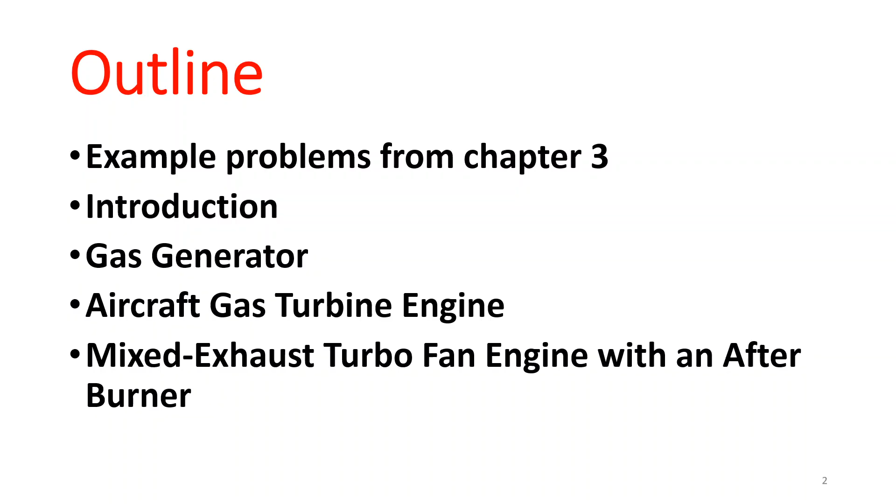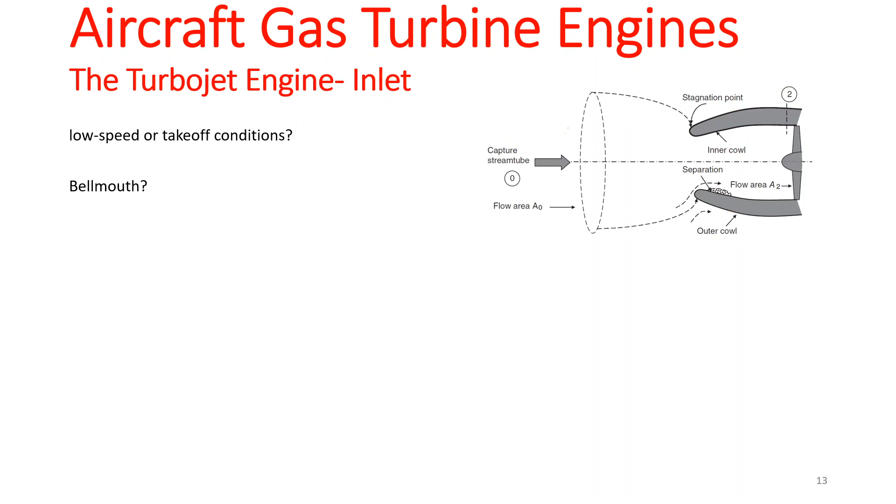I guess at this point I'm already exhausted with this semester, so I'm ready for it to be done. Just make it online? That's actually gonna be worse, I think. I'm ready to give you all an A and just be done with it. But...

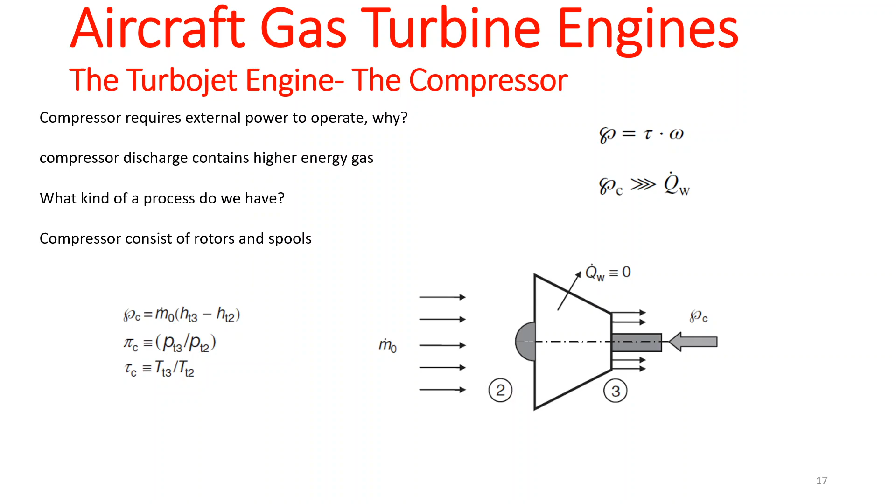So the last thing we talked about was this page, right? We didn't finish the compressor, did we? Okay.

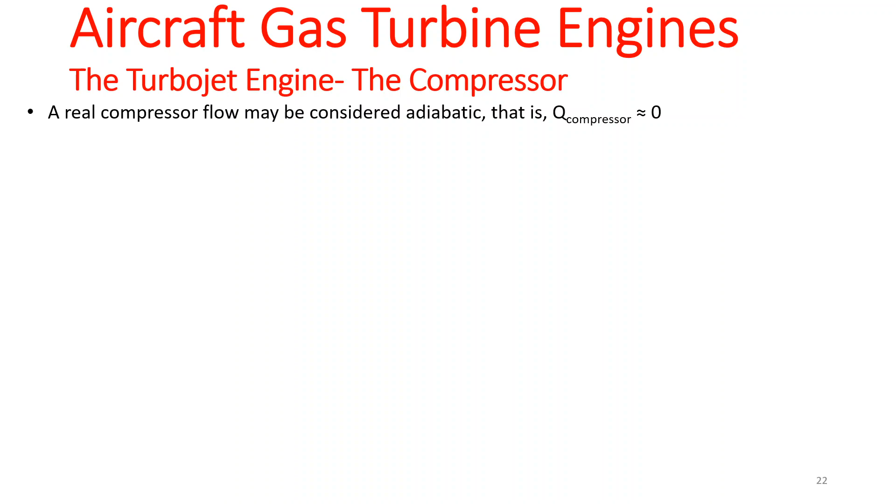A real compressor flow may be considered adiabatic, which means that Q of compressor is essentially 0. The energy transfer to the fluid due to the shaft in a compressor is several orders of magnitude higher than any heat transfer that takes place through the casing. Thus, heat transfer is

neglected. Viscous dissipation in the wall boundary layer and shocks account for the source of irreversibility in a compressor.

We have two main figures of merit, if you will, that describe the compressor efficiency. One is the adiabatic compressor efficiency, eta of C, and the other one is the polytropic or small stage efficiency, E of C.

And the two compressor efficiencies are actually related to each other. The compressor polytropic efficiency is independent of compressor pressure ratio, whereas the compressor adiabatic efficiency is a function of the pressure ratio and decreases with increasing pressure ratio. And to achieve a high pressure ratio in a compressor, multi-stage and multi-spool configurations are needed.

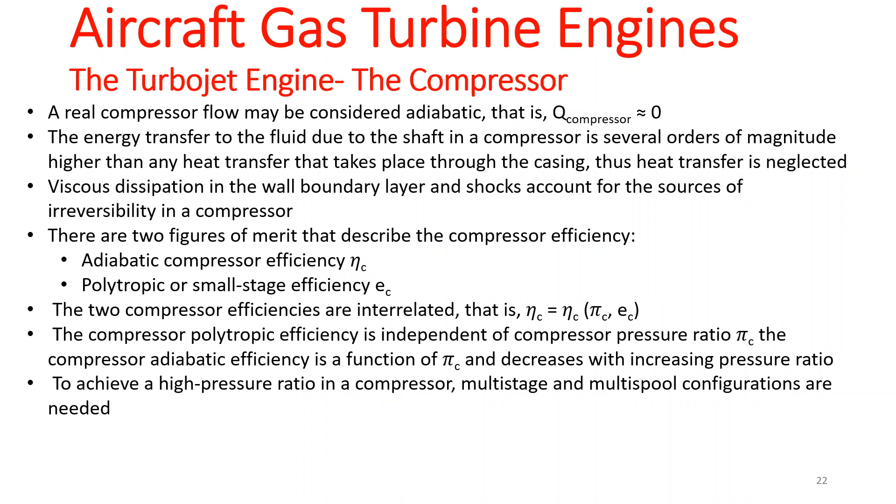Now, have we talked about the multi-stage and multi-spool configurations? Just a little bit, just an introduction to it, right? Okay. So,

we already know that. So let's solve an example for the compressor analysis.

This is a book example, as the previous examples we have solved. It says a multi-stage axial flow compressor has a mass flow rate of 50 kilograms per second and a total pressure ratio of 35. So your m dot is 50 kilograms per second.

That's m dot naught, and the total pressure ratio pi of C is 35, right? The compressor polytropic efficiency is 0.9, E of C is 0.9. And the inlet flow condition to the compressor is described by the total temperature, that's T2, TT2, 288 Kelvin, and

PT2, 100 kilopascals. Assuming the flow in the compressor is adiabatic, and assuming constant gas properties through the compressor, meaning that gamma is 1.4 and we have a constant Cp of 1004, we want to calculate the compressor exit total temperature in kelvins. Okay.

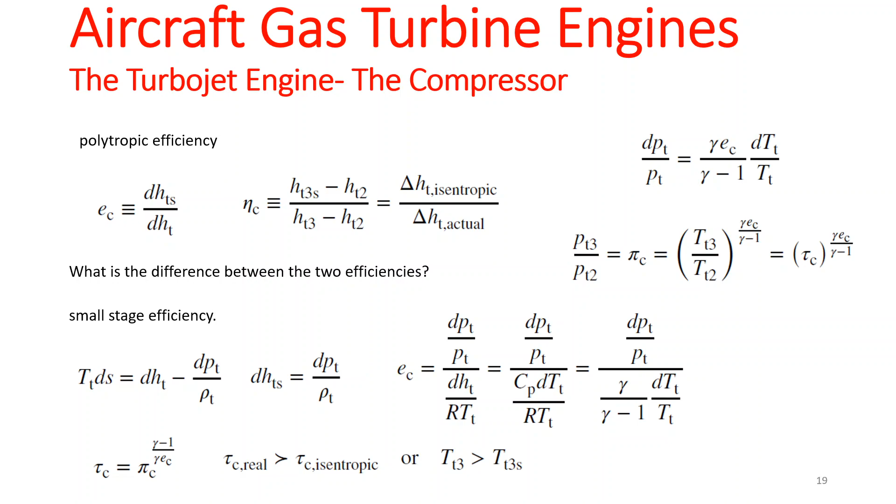So gamma minus 1 over gamma. The only difference was this small stage efficiency. That's actually what we used in the adiabatic efficiency calculations in the next slide as well, right? That's what we replaced temperature ratio with, right?

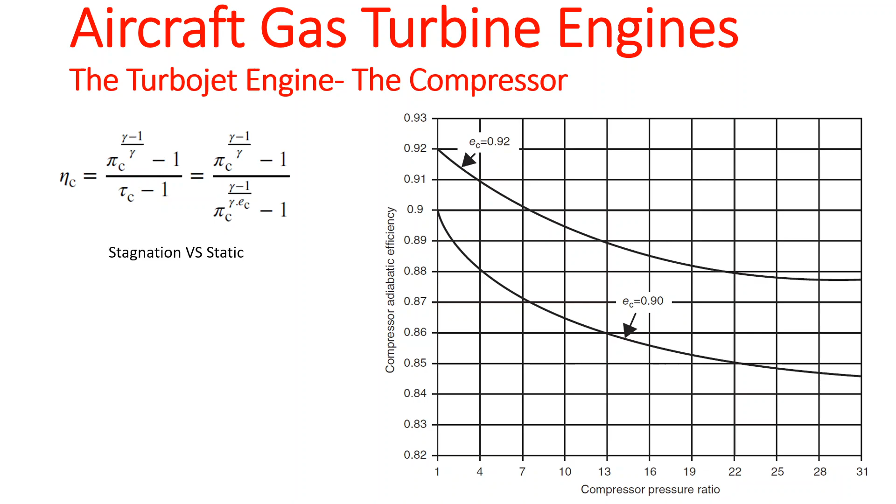So do we have the compressor pressure ratio, right? We have gamma and we have E of C, okay? Which essentially means that you can calculate the temperature ratio. What would be the temperature ratio here?

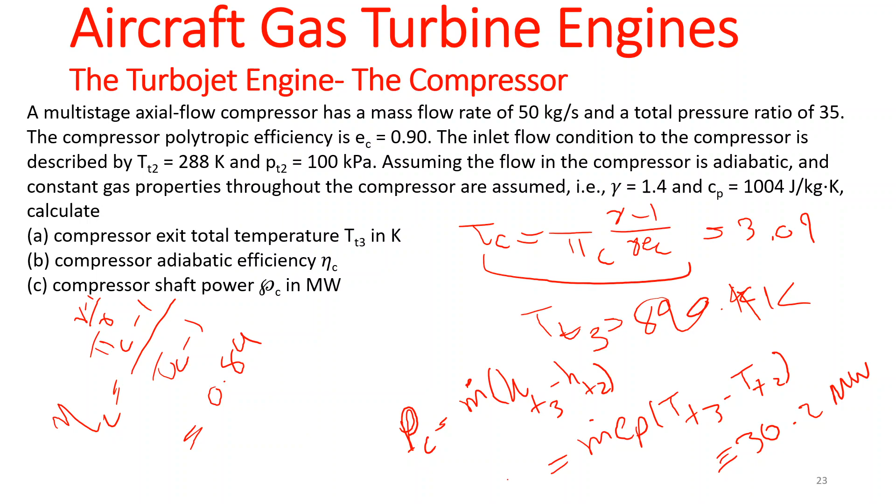Okay, so let's talk about the burner. Let's move on from compressor to the burner or the combustor.

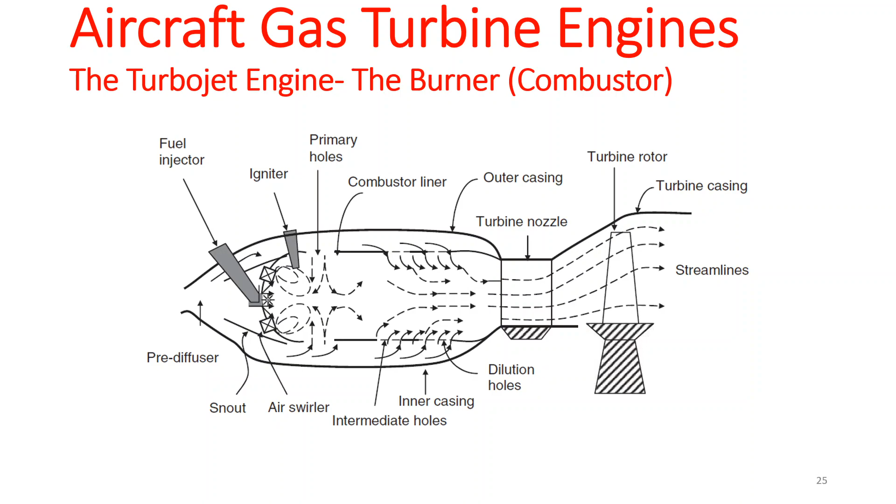But we are not really concerned, because we are doing a cycle analysis, which is systems level analysis. We are not really concerned with what's happening inside the combustor, same as with the compressor - we were not concerned with what is happening inside the compressor. We were just concerned with the inlet and the outlet. So the same thing is true for a combustor or a burner as well.

So we are - sorry, I think this is being recorded. So online people, sorry guys, you just hear a lot of noise.

Yeah, we are not really concerned with what is happening inside the combustor. We are only concerned with the inlet conditions and the outlet, right? So we have two inlets in the combustor compared to one inlet and one exit for the compressor and all the other parts. The only section that really has two inlets is the combustor, which has m-dot fuel coming in. So we have the fuel injection and air coming in as well.

So we can write a very simple mass balance: whatever is coming in has to go out - that's your mass balance. We can also have an energy balance: the total energy at the inlet for air is m-dot HT3, and for the fuel it's going to be QR of the fuel, which is the fuel heating value, multiplied by eta of the combustor or burner, which we'll talk about later, multiplied by m-dot fuel. Whatever is going out is going to be the total enthalpy at stage 4, which is the exit for the output of the combustor, multiplied by the total mass going out.

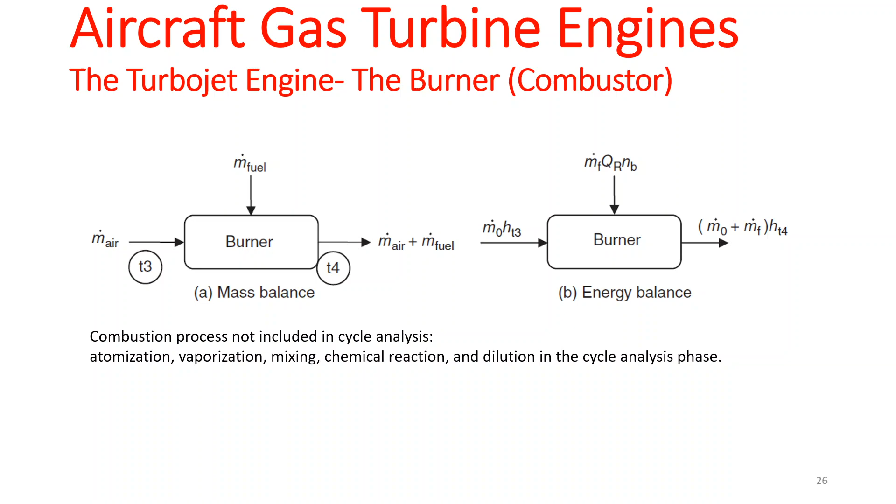Inside the combustor we have a lot of processes happening. Dr. Wang and Dr. Farooq are both very interested in whatever is happening inside a combustor - the reactions, the atomization, vaporization, the mixing, and whatever is happening inside a combustion chamber in general. But it's not the focus of this course, because we are doing a cycle analysis. So, to put it in the most general terms possible, in a combustion chamber, in a combustor, or in a burner - this way we call it burner - wherever you see subscript B, it's talking about the combustor or burner.

I'm very used to the word combustor, so don't get confused - ask questions if you will. So the fuel is being added to the air, and through it we have some igniter that will ignite, and we will have the combustion process happening. It's an exothermic process, which means we will have a heat release - a huge heat release after the combustion.

Okay, an ideal burner's process is a reversible process. But then the question is, what is an ideal burner? How can we have an ideal burner? What does a reversible process mean? It means that there is no change in entropy. Just think about it - you have combustion happening, essentially explosion happening inside the combustor, and we are saying that it is possible to have an ideal burner with explosion inside, that it is possible for its process to be reversible. How is that possible? What do you guys think?

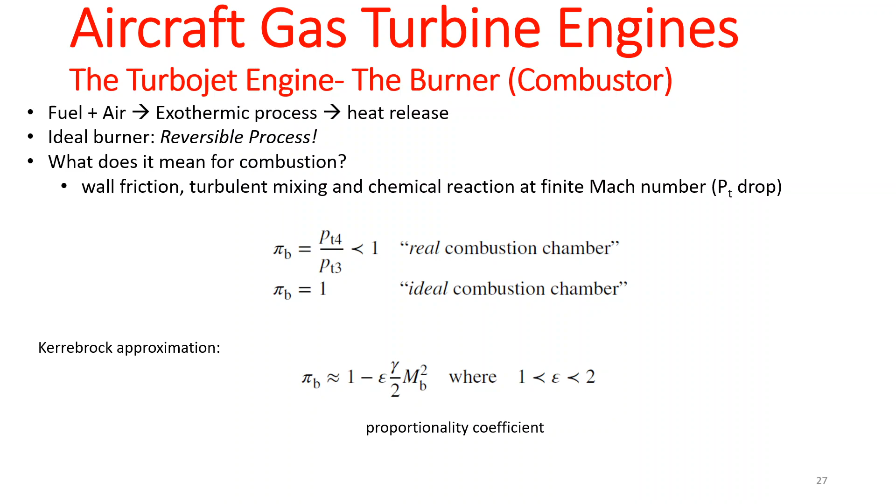Okay, so let's try to find the equation. Let's try to calculate the efficiency of a burner or a combustor. The first thing you want to do is write the conservation equation.

Conservation of mass is going to be your m.4, which is your exit mass flow rate, going to be just a summation of your inlet mass flow rate, which is m.0 plus m.f, and we have already defined f as fuel to air ratio. So essentially we can take the m.0 out and rewrite the equation as m.0 multiplied by 1 plus f.

Okay, we can write the energy balance. The input energy is going to be m.0 multiplied by ht3 plus m.f qr multiplied by efficiency of burner, which has to equal your energy at the outlet station, exit station, or station 4. It's going to be your m.4, which is m.0 plus m.f multiplied by ht4, and we can rewrite that as m.0 multiplied by 1 plus f, ht4.

Okay. But how do we, this is actually how we define the efficiency of the burner. The efficiency of the burner is going to be the actual heating value of the burner divided by the ideal heating value of the burner.

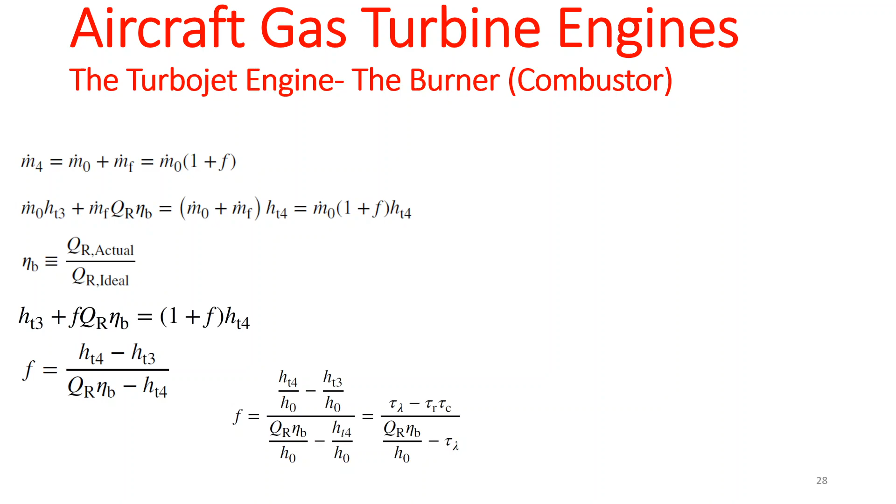And we define this HT4, which is your burner exit total enthalpy, divided by H0 as tau of lambda. This is something you just have to memorize, I guess, because it's a little harder compared to other ratios to conceptualize, if you will. But tau of lambda is essentially your cycle thermal limit parameter, which is your exit temperature of the combustor divided by your ambient temperature. Does it make sense? Okay.

And then HT3 over H naught, if you multiply and divide this by HT2 divided by HT2, and just rearrange this a little bit. Let me actually write it down here. So HT3 over H naught, if you multiply it by HT2 over HT2, which is the inlet, which is your diffuser outlet or your compressor inlet, right? That's station 2. If you don't remember the stations, let me know, because we can always go back.

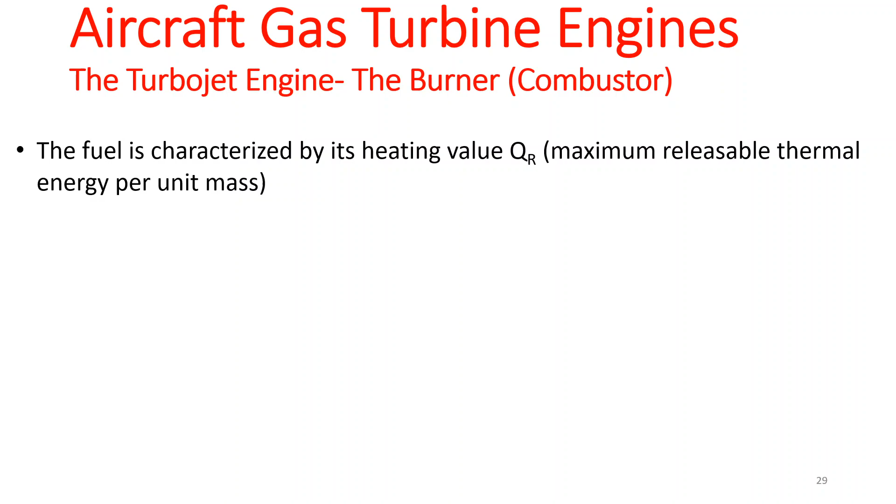So let's do a quick summary of the combustor or burner. The fuel is characterized by its heating value, QR, which is the maximum releasable thermal energy per unit mass. The idea of burner efficiency comes from the fact that you will never get the maximum releasable thermal energy per unit mass from your fuel — it's going to always be smaller. The burner is characterized by its efficiency eta B and its total pressure ratio. Burning at finite Mach number, frictional losses on the walls, and turbulent mixing are identified as the sources of irreversibility. The fuel to air ratio F and the burner exit temperature are the thrust control and engine design parameters.

We already know the last part. Let's solve an example.

Again, this is an example from the book. A gas turbine combustor has inlet conditions of T3, total temperature at the inlet, 800 Kelvin, PT3 of 2 megapascals, air mass flow rate of 50 kilograms per second, gamma 3 of 1.4, CP3 of 1.04, and we are adding a hydrocarbon fuel to it with an ideal heating value of 42,000 kilojoules per kilogram at a rate of 1 kilogram per second, which means that your m dot f is 1 kilogram per second. The burner efficiency is 0.995, and the total pressure at the combustor exit is 96% of the inlet total pressure.

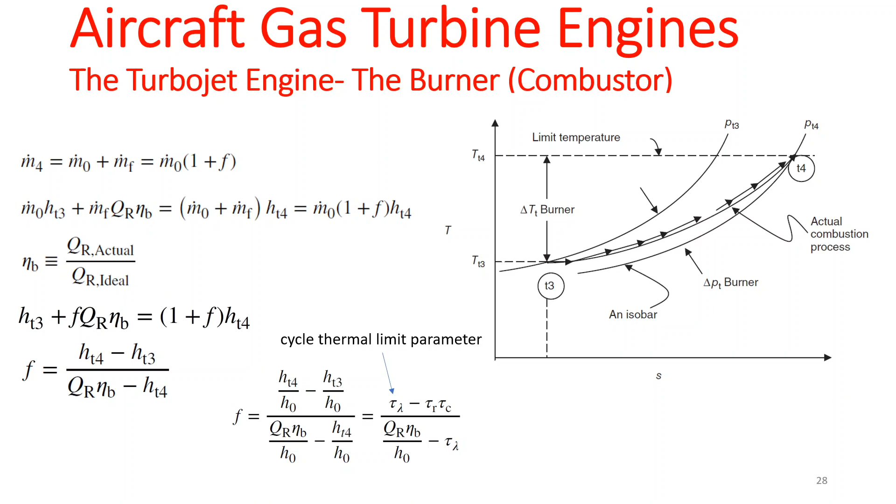So essentially what's being said is that we can actually find the HT4, right? Total energy at the outlet. And how can we calculate the temperature then using H, the total energy? H is CP times change in temperature. That's the idea, but the only thing you have to be mindful of is that here you have to use CP4 multiplied by T — so HT4 is CP4 multiplied by T, right? That's it. So do this calculation and see what you're going to get for temperature.

What about pressure? That's it, yep, so that's 0.96. We have the pressure ratio — that's 0.96 multiplied by the 2 megapascals.

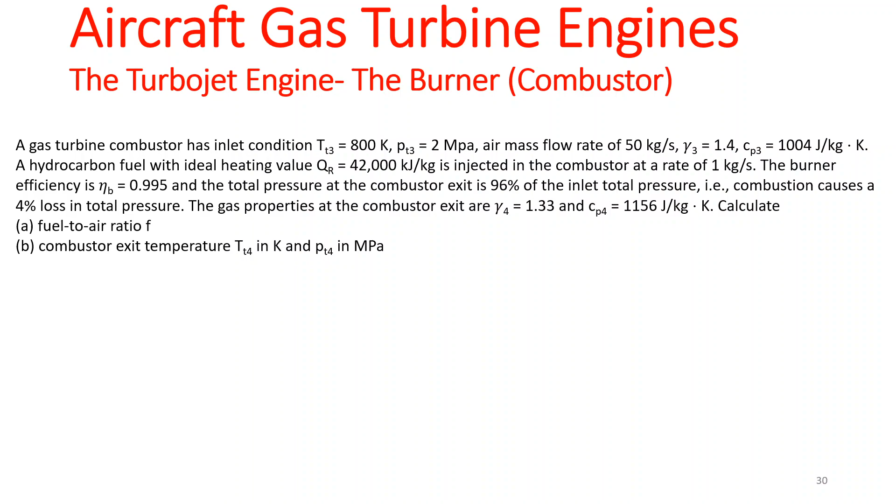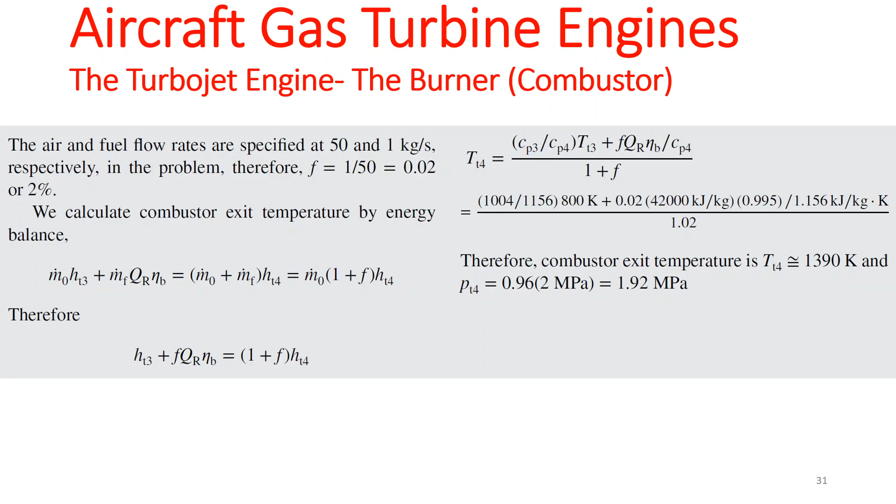1390 Kelvin, and your total pressure is going to be 1.92 megapascals. What did you say the temperature was? 1390. And pressure 1.92. Okay, so moving on to turbine.

So turbine, what you see here is essentially a combination of a compressor and a turbine, which are connected to each other through a shaft, right? And in our kind of cycle, we have the compressor, then the burner, and the turbine afterwards. But the power of the compressor is generated by the turbine and is moved to the compressor from the turbine through the shaft, right? But what is the job of a turbine?

Job of a turbine is flow expansion. What is flow expansion? Flow expansion is the flow process, essentially in a turbine, which involves significant static pressure drop with a static temperature drop. So essentially, at the exit of a turbine, you would expect to see a lower pressure, colder gas. That's the idea, right?

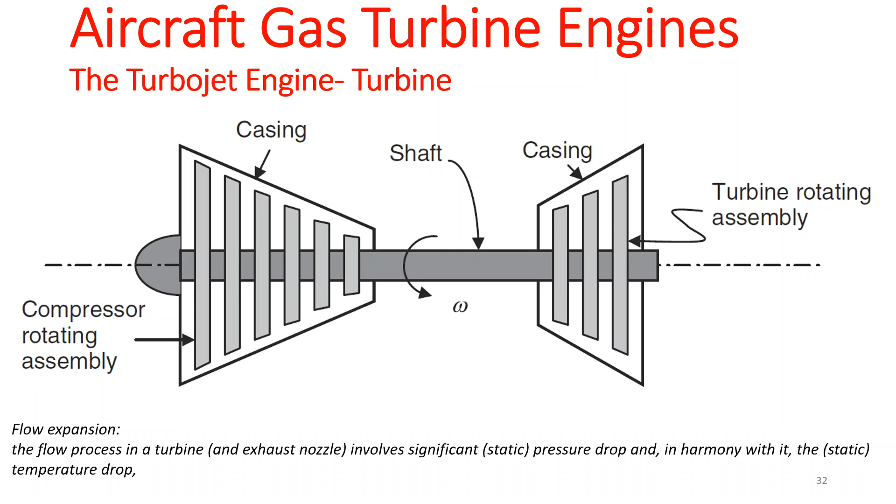And your HS, let me ask you this before talking about it. So for the burner part, we represented a TS diagram instead of an HS diagram. Why was that? It goes back to the fact that the CP at the inlet station and the outlet station of the burner is going to be different, right? So a TS diagram is definitely different from an HS diagram, and it is harder to examine because there we are going to have two factors in the changes in enthalpy.

One is going to be CP, one is going to be temperature. So you want to just isolate the variation to only temperature. That's why we use TS in a burner. But in all other parts of the jet engine, we can use T or H, doesn't really matter, because the only variable is going to be temperature, right?

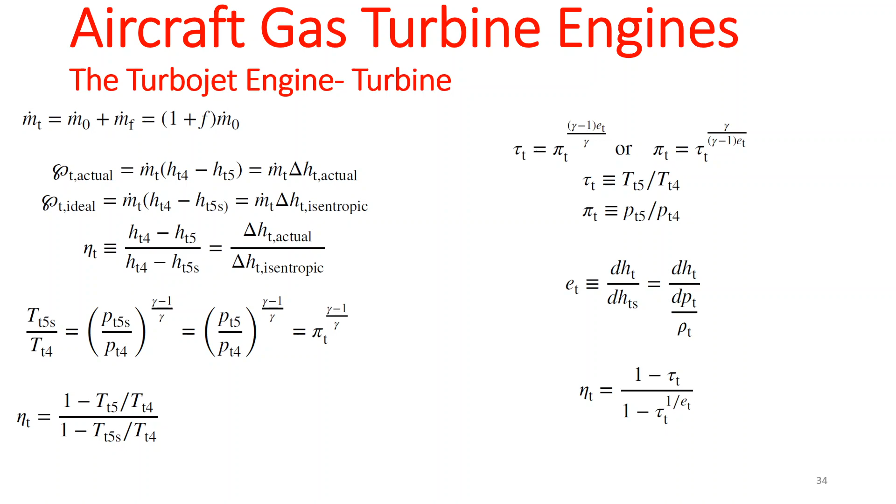Is there any questions? No? Okay, so let's move on.

We can actually find the turbine expansion ratio, which is 1 over tau of T, as a function of turbine adiabatic efficiency. For different small stage efficiencies, here we have only represented one small stage efficiency of 0.9. You can see for higher expansion ratios, which means for lower temperature ratios, essentially we are going to get a higher efficiency.

But the other important part of the turbine is the energy balance between the turbine and the compressor. The idea is that the shaft power of the turbine goes to the compressor, so whatever power you have in the turbine must be equal to whatever power you have in the compressor. How did we calculate the power generated in the turbine? M dot naught multiplied by 1 plus F, multiplied by the changes in total enthalpy. For a compressor, our M dot is only M dot naught, and we just have to multiply it by the total enthalpy change of the compressor, which is HT3 minus HT2.

If you play with this a little bit, if you just take the HT4 out here, for example, and divide the whole thing by an H, you have to play with it to get from this equation to that one, but you will definitely get there if you play with it. You can actually find this as a function of temperature ratios, or taus. What was tau of lambda? Does anyone remember?

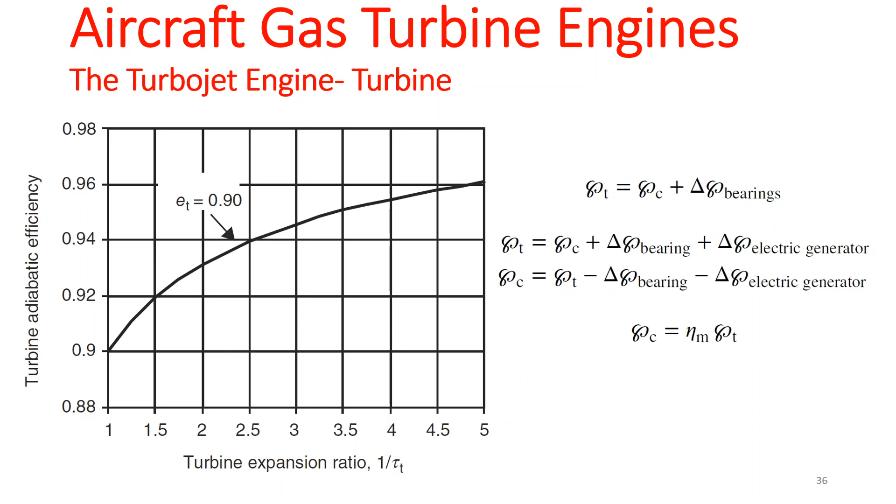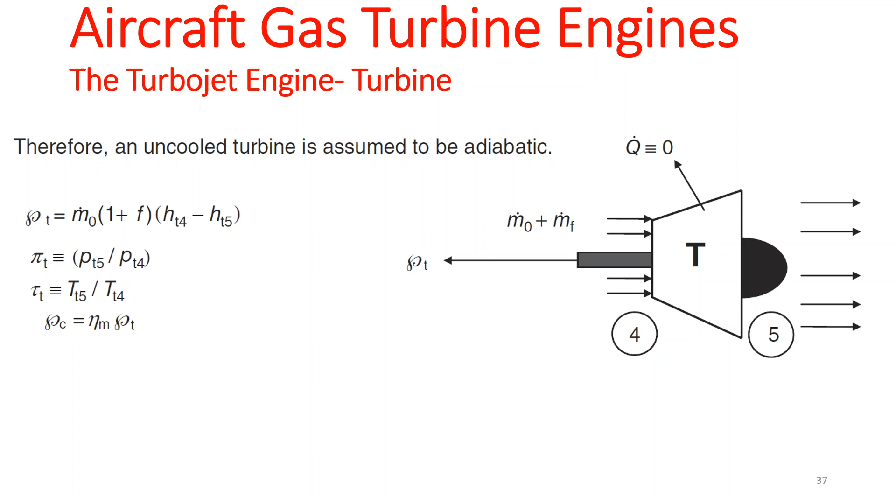And we just have turbines adiabatic, as I just talked about. So the other part of the turbines we need to focus on before solving an example is a multi-stage turbine. So just like the compressor, we can have multi-stage turbines.

We also have something in the turbine called turbine cooling, and it happens at different stages. Essentially, you get cold air from the compressor, from different stages of the compressor, to cool down the air at different stages of the turbine.

The only part you have to be mindful of is making sure you get the air from the correct stage of the compressor - meaning a stage that has the equivalent or higher pressure than the turbine stage, because you don't want flow going back into the pump. You always want your compressor flow to mix with the turbine flow and make it a little colder. That's the idea. We'll talk about turbine cooling stages later.

Any questions so far? Okay.

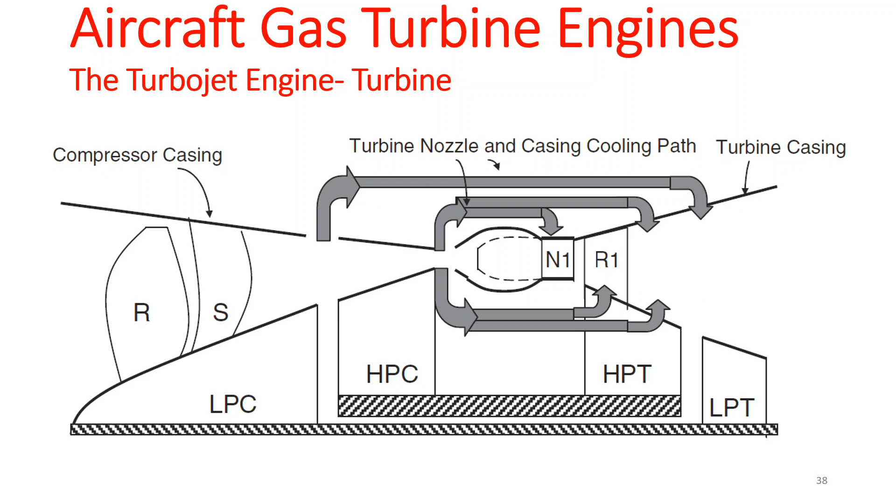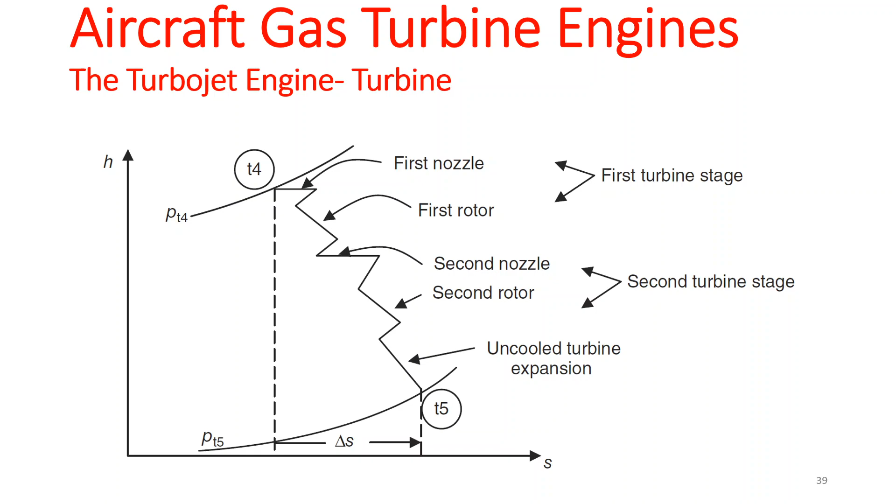So for the HS diagram, a multi-stage turbine is going to be a little different. It's not going to be a straight line, of course. It's going to have all of these zigzags in it. We'll get to this a little later, but let's do a small mathematical analysis on whatever is happening here.

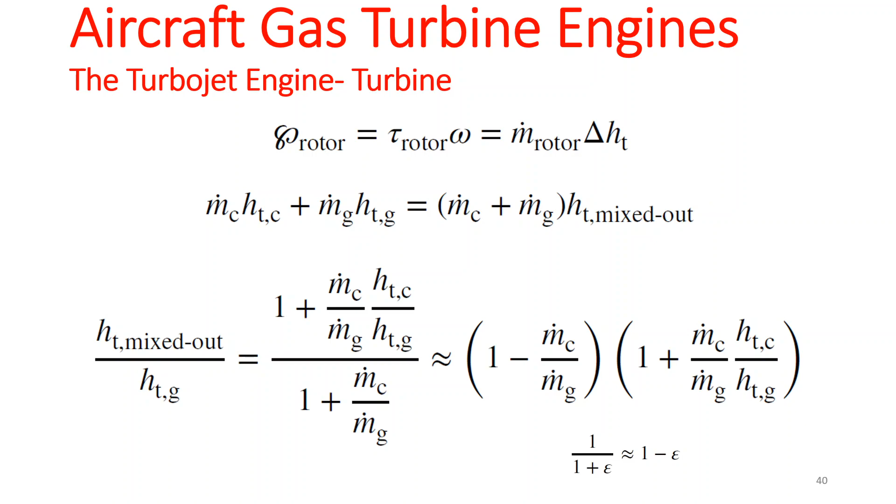I guess, but the next class is a little aggressive with timing — they always keep coming in. So we are going to stop here. For the next lecture, we are going to solve a nozzle example, and we are going to solve a turbine example. We will talk about nozzles, and we will finish the turbojet engine cycle analysis. Then we will start working on the turbofans and the afterburners and so on and so forth.